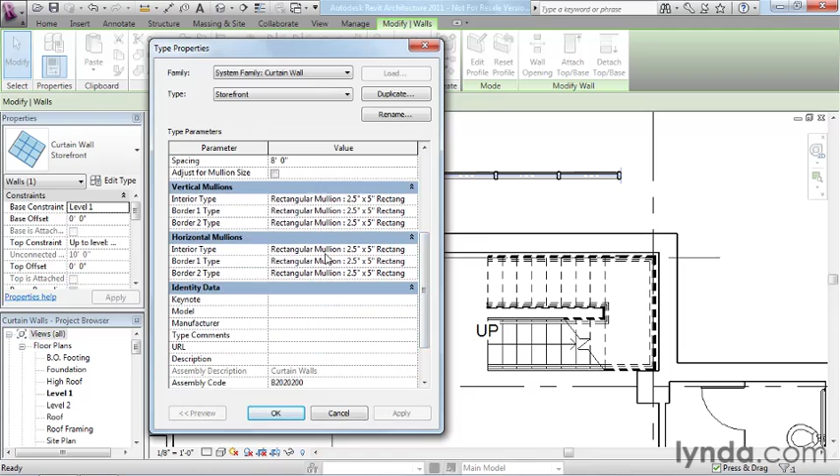While we're here, just real quickly down here at the bottom, you can see that there's a variety of settings for mullions, and in this case, they're all set to the same 2.5 inch by 5 inch mullion, which we're seeing here very clearly in a section cut.

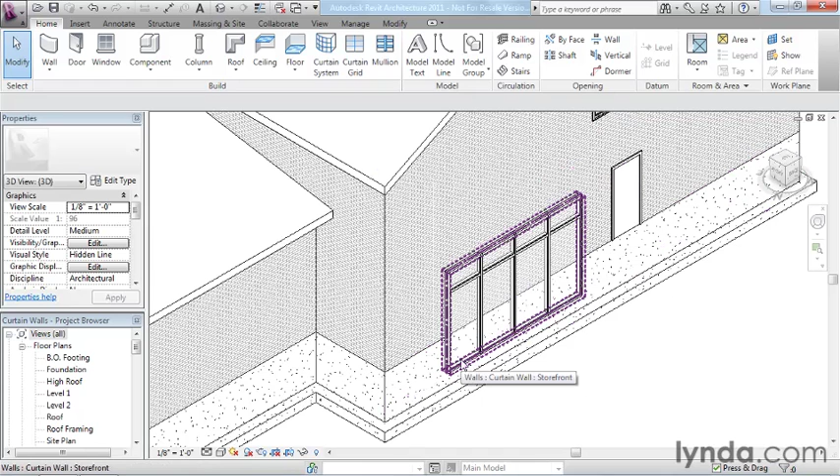Now, before I move on from the curtain wall that we have here on screen, let's take a quick look at it in 3D, and I'll do that here on the QAT by going to the default 3D view. Let's go ahead and spin the view around, and then zoom in, like so. And there you can see very clearly the 8-foot spacing that we were just looking at for this curtain wall. If I highlight it in this view, instead of the little long thin dashed eye shape, we get more of a dashed box shape. So it's the same thing though. If you select it, you're actually selecting the entire curtain wall.

Now I'm going to delete that, go back to the floor plan, and I want to show you one other neat feature of this particular curtain wall. The storefront is still selected on my type selector. If you draw it right on top of another wall, it will actually embed itself in that wall. Let me show you that again. Draw it right on top of another wall. It'll actually embed itself in the wall.

Now, like doors and windows and other walls, there's also a little flip here. So you notice the glass is on the inside. I can easily remedy that by flipping it over to the outside.

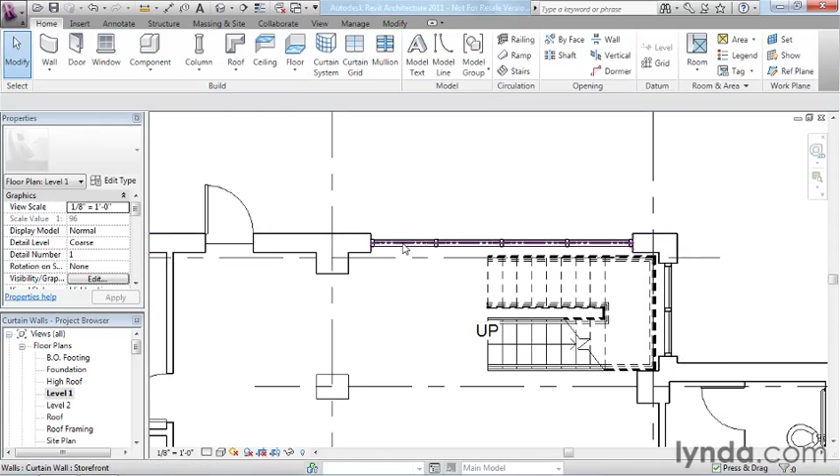So the setting that controls this embedding behavior was also part of the type, and that's right here at the top, this little checkbox, automatically embed. So when that's turned on in the type, the wall will embed itself and actually cut a hole in the other wall. So if we look at 3D, we can see that a little bit more clearly because you can see it's actually made a hole in the wall, kind of like a door or window would.

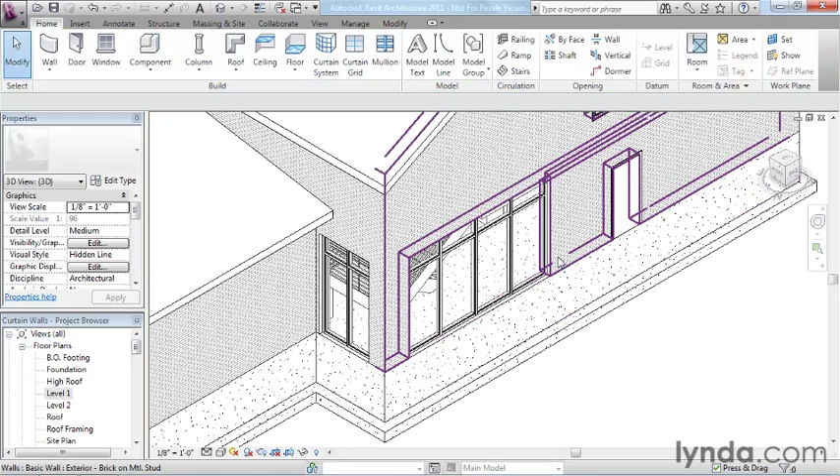Now, I'm going to go to an elevation view. Let's go to the north elevation. Zoom in. And I'm going to select the curtain wall. I might need to use my tab key. And with this little shape handle here, I'm going to drag it up and snap it to that level line right there. That gives me much more glass on that facade, a little bit more light in the stairwell.

And you can see again the 8-foot spacing is being repeated, and what I mentioned about the top is the leftover all occurs at the top. So again, that's all being controlled by the type parameters. Now, this is a little tight right here. Maybe that's not quite so nice. So let's look at one other feature that we can do here.

On the ribbon, when the curtain wall is selected, we can actually click this Edit Profile button. You can actually do this for any wall, not just a curtain wall. We'll do it here for the curtain wall. When you do that, you're in a sketch mode, and you get a sketched rectangle for the default shape of the curtain wall itself. But I can modify the shape now using any of my standard drawing tools.

And in this case, I'm going to use Pick Lines, because this is going to be the easiest way to do this. I'm going to set an offset of, I don't know, about 5 feet, and I'm going to highlight the edge of the roof eave. And by doing that, you'll see a dashed line appear down below it, and I'm going to click, and I have that sketch line, and now I'll trim it up, and I can change the shape of the curtain wall like so.

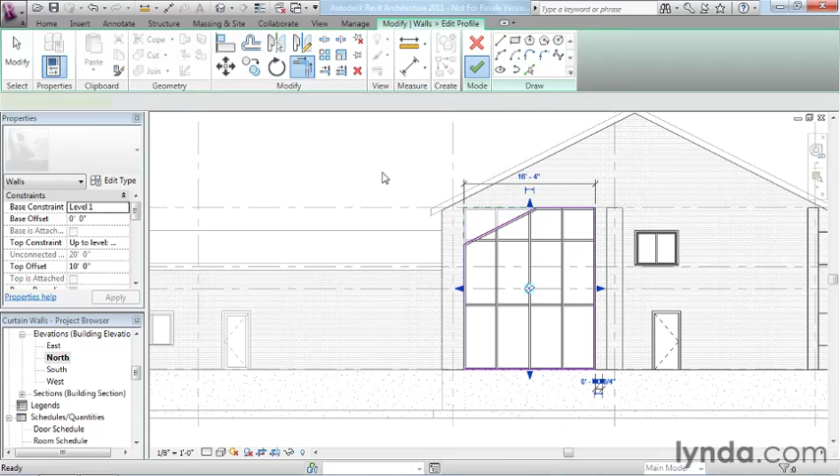And when I click Finish, you'll see it adjust, and it automatically adjusts any of the mullions and the grids and the panels and so forth to fit the new shape. So that's not too bad, right? Let's take a look at that in 3D, see the final result.

So let's draw one more curtain wall. I'm going to zoom back out to the front of the building, and it might be nice to put a curtain wall in this location instead of this single door. So I'm going to select the door, press the delete key, and delete it. But for this curtain wall, I want to have a little bit more control over the design. I mean, the storefront is fine with the whole 5x8 spacing, but I'd rather set up my own grid pattern. So I'm going to choose just the generic curtain wall type and draw it the same way that I did the other one along here.

But this time I'm going to get a little warning. And it says highlighted walls overlap, and one of them might be ignored, and at the very end of it, it says something about cutting geometry. So what they're telling us there is we need to use this tool right here, the Cut Geometry tool, to actually manually embed the one curtain wall within the other.

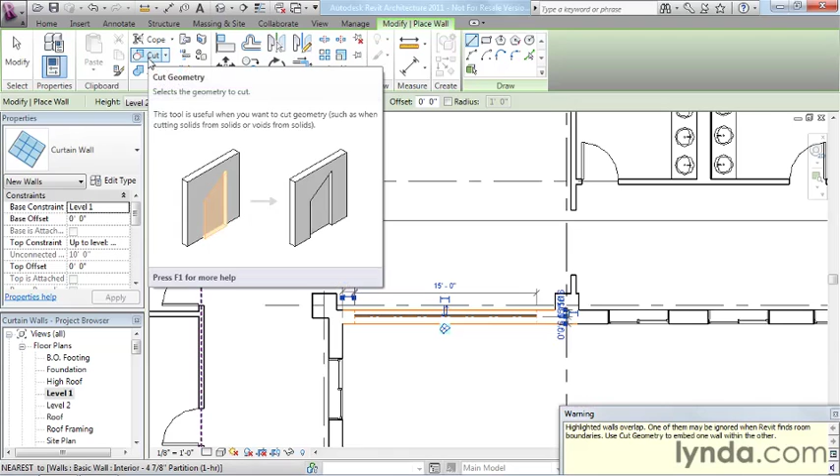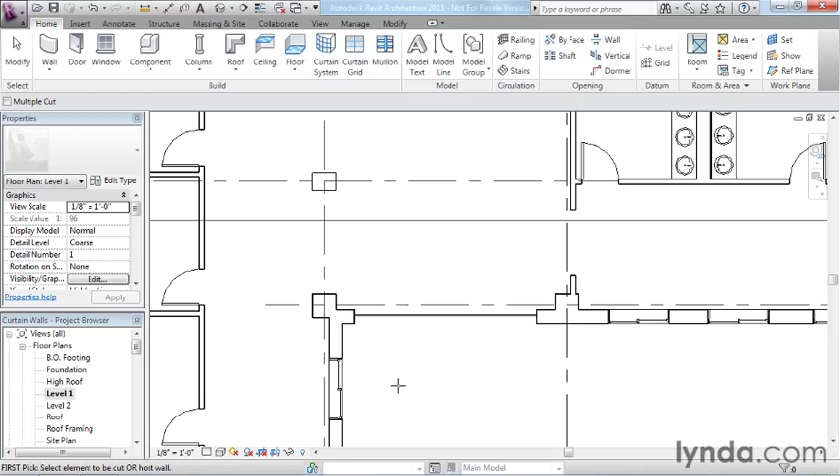Now, why do we need to do that? Well, if we click Edit Type, this one, curtain wall, rather than storefront, that's the type we're using, is not set to automatically embed. So that's why I have to use the Cut tool, tell Revit which wall I want to cut, and then tell it which wall I want to do the cutting with. And so now that embeds the wall. So that gets us set up for the next movie, and what we'll do is make a custom design on the front here to give us a nicer entrance to the building.